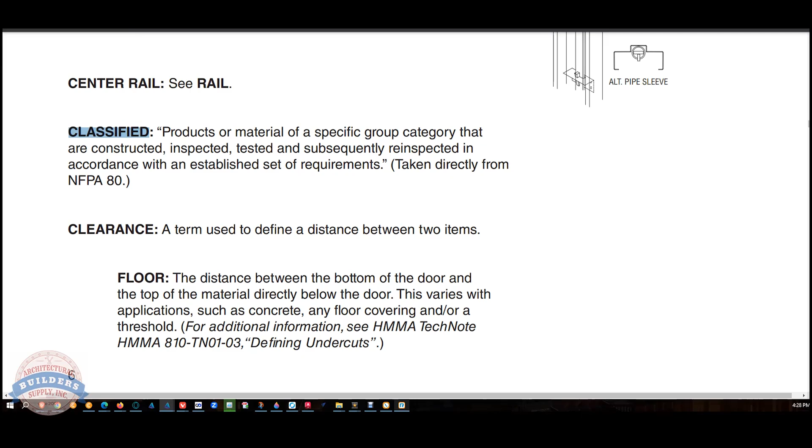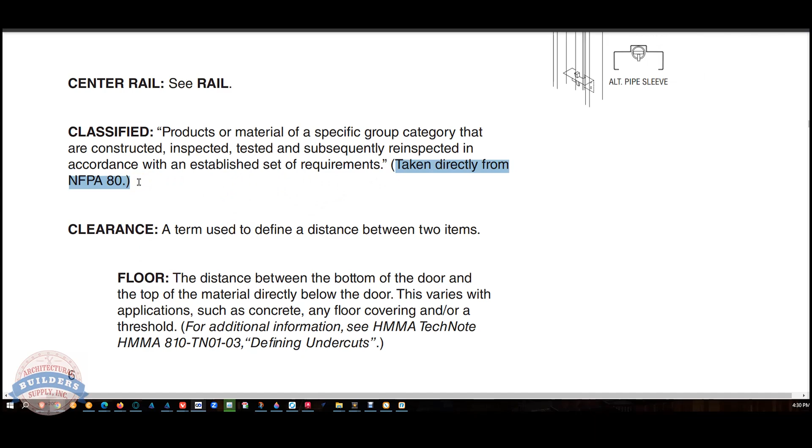So thinking of class or classified, looking back at the definition taken directly from NFPA 80, I don't see anywhere in NFPA 80 where this is called out. Now, it could be an edition of NFPA 80 that I'm not looking in, but in the 2013 edition, I don't see that anywhere. I don't know that it really so much matters, but it's important to understand that when something is classified, it belongs to a class of something. Therefore, it has been found to be in accordance with the requirements of the definition of that classification.

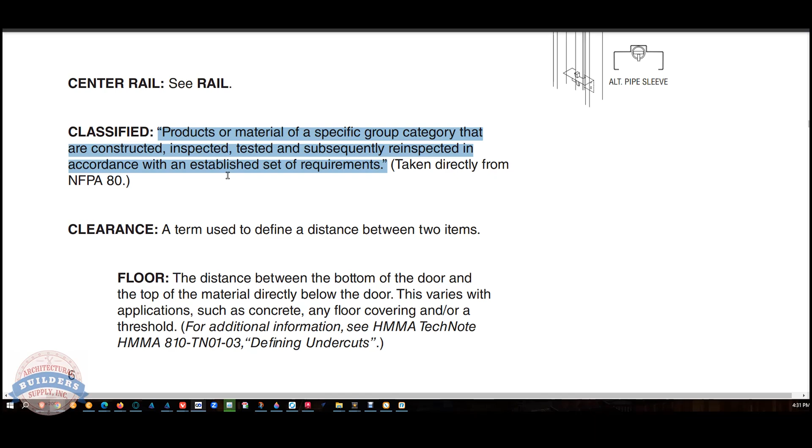Like an ANSI standard would be, such as an ANSI standard for a hinge or a doorstop, or UL 437, such as a UL listed cylinder. It's classified UL 437 because UL 437 is a standard for high security cylinders. And to be classified as UL 437, it has to have been found to be tested to withstand physical attacks like picking, sawing, prying, pulling, drilling, bumping, drill resistance, endurance, or other methods of forced attack.

So the term classified for me really sinks in when I think about whether or not something is compliant with a requirement. If your customer is saying, I need a Class A door, that means a 3-hour door. That's very clear. You know it has to be classified. But when we use the cylinder as an example of a UL 437, the cylinder has to be classified UL 437, and the word classified is appropriate to use, I believe. You understand that there's been a test that the material has been found to be compliant with, like a Class A, Class B or Class C door. A 3-hour, 90-minute, 45-minute door has been tested and found to be compliant, so it can now be included in that group.

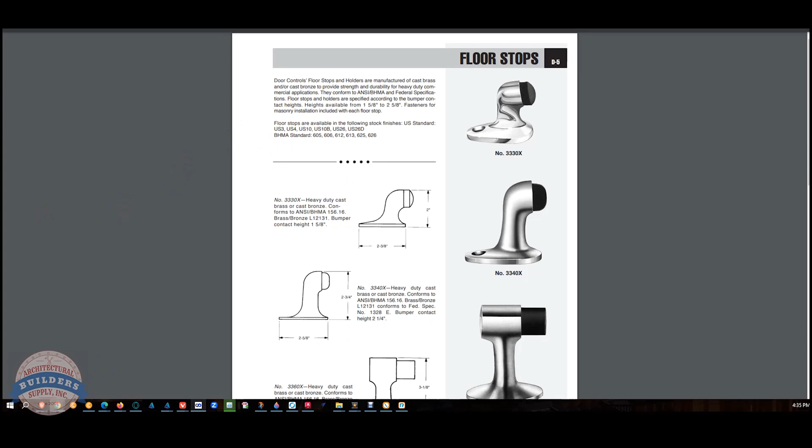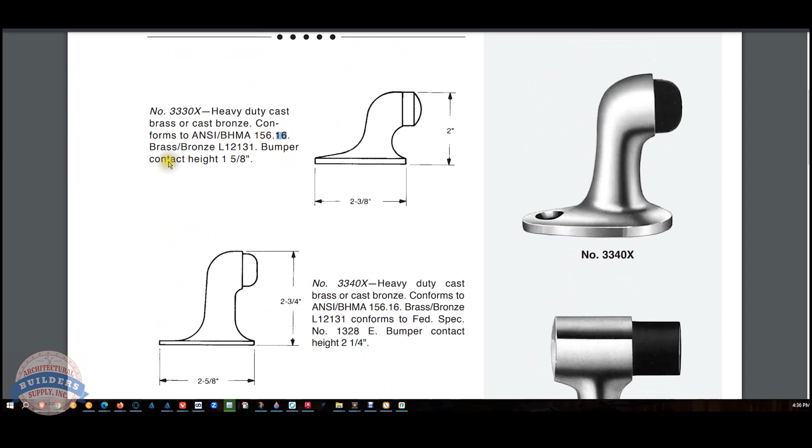So if your specs say that your stops have to be compliant with this ANSI document, the product is specified compatible with ANSI. It is therefore classified. It's under that class of approved products according to the objective third-party governing organization.

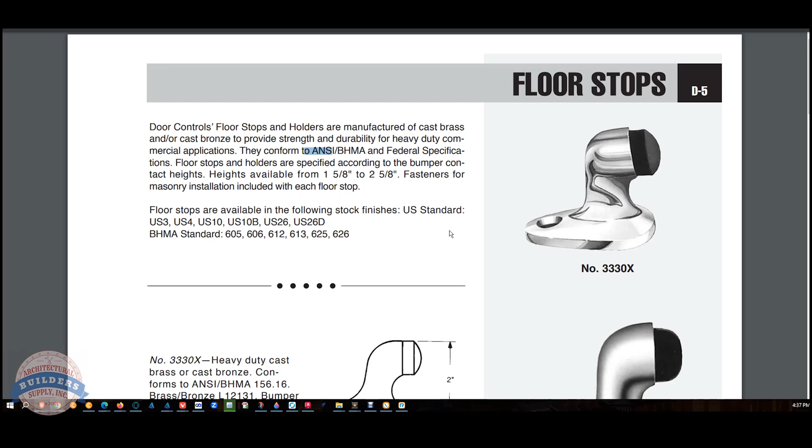So I think of, it's not just doors, but it's hardware, that there has been a bar set that someone is saying if it must be classified to whatever that classification is, it is therefore compliant with the requirements of who's specifying it to be compatible with that classification.

Okay, the next definition is clearance. Wow, that's going to be a good one. Clearance has lots of, we'll break them up into different sections. Clearance will be next.